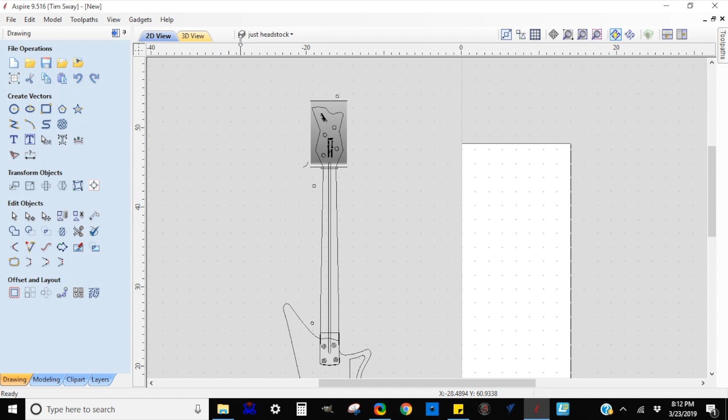I use Aspire by Vectric to do all my CNC work, and I actually just use it to design too. Some people might choose to use Illustrator or whatnot for doing their 2D drawings and then bring it in to make it 3D, but I just draw in it because I don't have Illustrator, and I like learning the program. I feel like this is a good way.

So I opened up, created a new file, and took one of my other bass guitars. I later bring some other body designs in to have them for reference to work off of, because to me it's important that there's a family and a relationship between the instruments that I make. So I'm starting with one of my basses instead of starting with this Pachyderm bass.

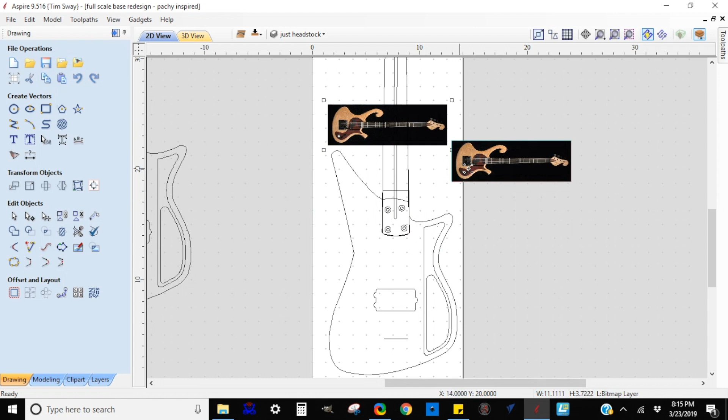Now, what I just did is I was able to grab the Pachyderm bass and then create vectors just by taking the picture and getting those lines. I'm not going to use them because they're all cruddy, since I didn't put any effort into it. You can see they're all mishmashed and not really usable, but it gives me something to work with.

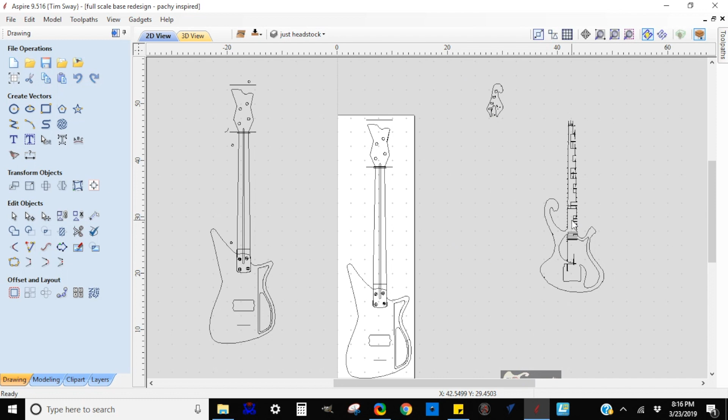The other thing I could do is take that picture and trace it, but I decided not to do that either. I'm showing you could start and clean it up, but it's just too much work. It's not worth it. It's easier to just trace it or make your own shapes, but I just left that there for reference, and I got to work.

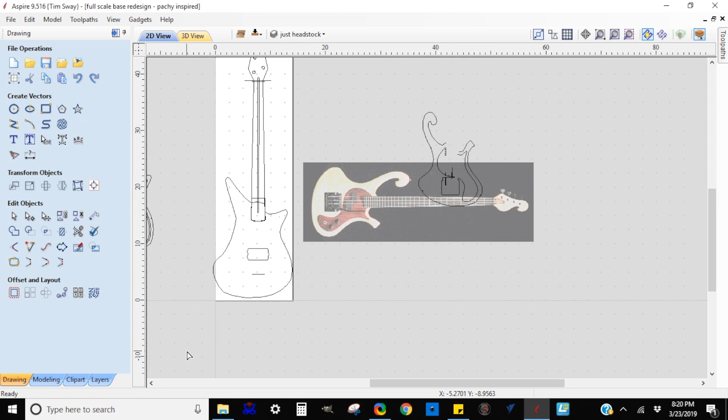So now I have proportions for this bass that I designed that I like, and I'm working within that realm, just moving around actual points and pixels. This isn't efficient, but I'm not trying to be efficient. I'm just experimenting to see when I pull things in certain directions, what happens to the overall proportions of the instrument. That's why I keep zooming in and out, just putzing about it.

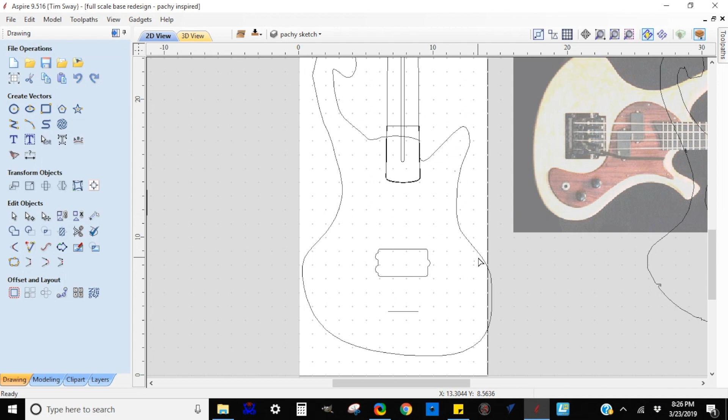What I just did there is I actually backed my way through all the work I did back to the original bass, and so I looked at it again in reverse. Now I'm dropping in that rough sketch I have, and I'm messing around with the points in that and mixing them with the body I have.

Again, it's not really about efficiency, it's about looking at the two things on top of each other and next to each other and experimenting with the shapes. I don't want to copy it exactly, so I'm not really sure exactly what I want to do yet. Where do I want to add weight? Where do I want to take weight away? Always relating it back to my original design that I like, that I want it to be related to.

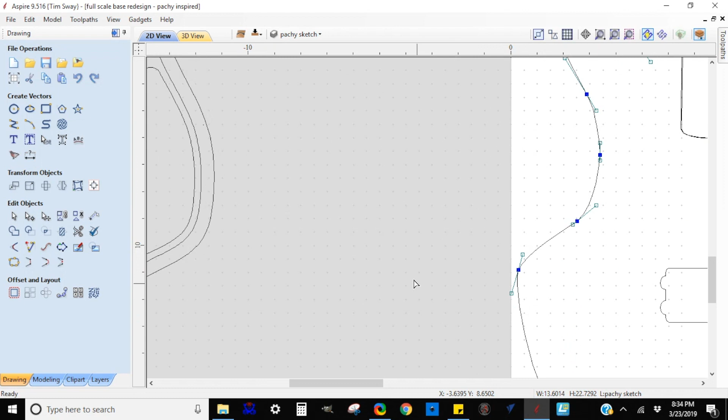Now here I just jumped ahead quite a bit. You can see I brought in another body design of mine into the image. And now I'm a little bit closer, this is after a good hour of messing around, which would just be boring to watch here.

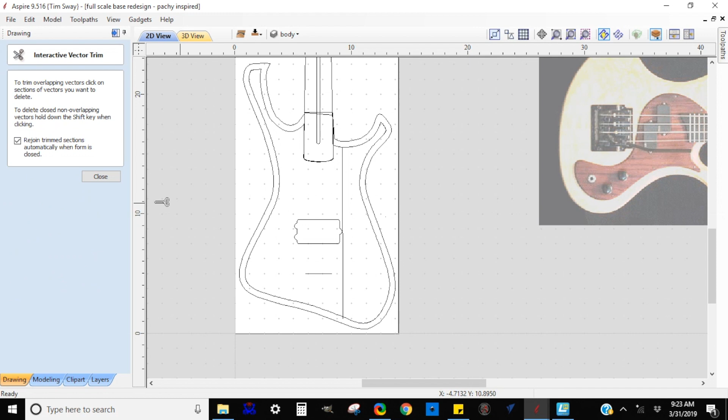I'm pretty close now on the shape that I want. I took cues from the bass that I'm inspired by, the Pachyderm bass, on the horns, but then I took away some of their key signature shapes and changed them to make them more mine. More importantly, the bottom half of the bass is making reference to my designs, and I feel like I came up with a shape that's pretty well related.

I'll zoom out again in a minute and you'll be able to see them all next to each other.

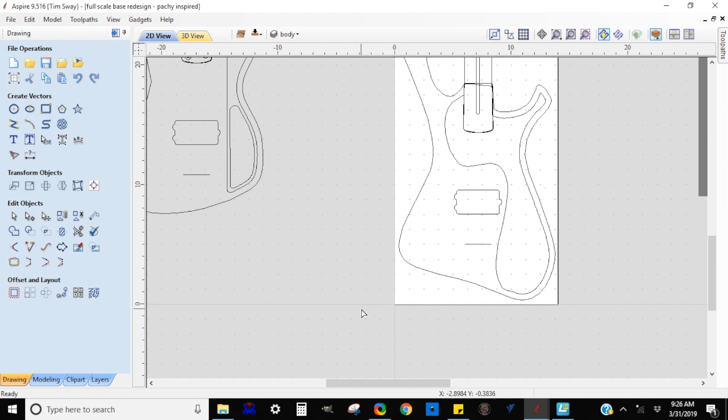And here you can see what I've come up with. You can see two of my designs to the left, as well as the one that I'm inspired by on the right, and something that's somewhere in between that I think looks pretty cool. But it's still just on a computer screen.

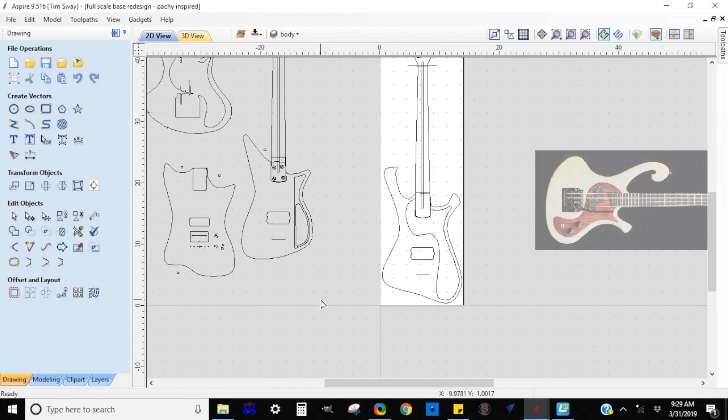Now, personally, my brain works in 3D, and I'm a tangible kind of guy, so for this to mean anything to me, I need to actually cut it out. So I simply cut it out of my laser cutter, out of this 1/8 inch hardboard.

This isn't really any different than if you were to do this type of work without a computer. The difference is you would use a pencil and paper instead, and then you could transfer your paper onto some material like this and cut it out to get yourself a physical template. If you were to not have the CNC machine and want to continue from there, you could use this template. If you cut these parts out all the way, you could use this template now with a bearing router bit and actually cut out your guitars.

The thing I like about holding this now is I can actually get a sense of scale of how it would sit on a human body. I can take physical pieces of hardware and line them up, put pickups on, put knobs on, and figure out in the real world how I think this will look best.

So now, before I make any decisions, I'm going to live with this for a couple days and see if I like it.